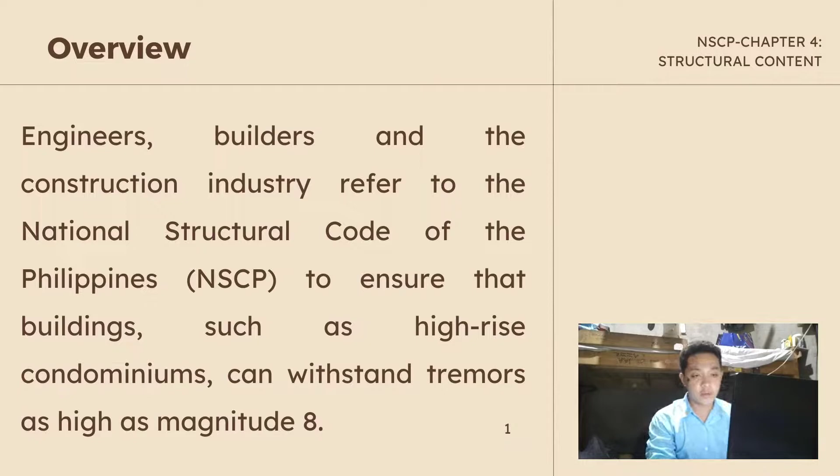Let us now move on to Section 414, Plain Concrete. This section implies the design of plain concrete members, including members in building structures and non-building structures, such as arches, underground utility structures, gravity walls, and shielding walls.

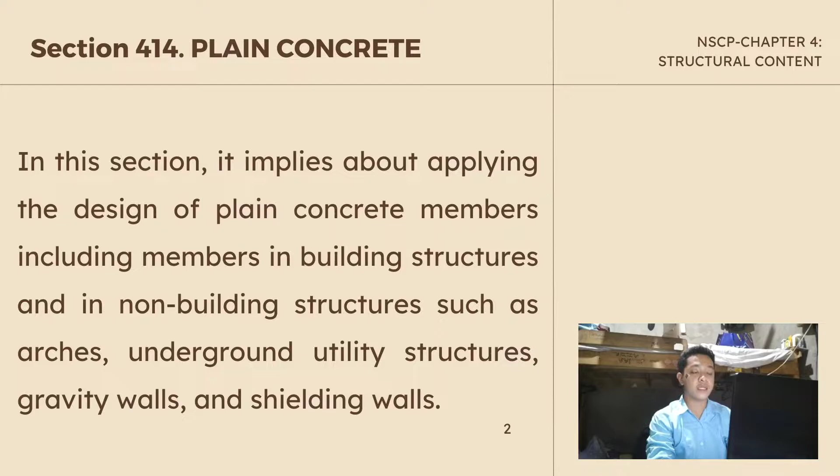It is mentioned in the section that it shall not govern the design of cast-in-place concrete piles and piers embedded in ground, and plain concrete shall not be permitted for columns and piles.

Now for Section 418, Earthquake-Resistant Structures. This section shall apply to the design of non-pre-stressed and pre-stressed concrete structures assigned to seismic zone 4, and a reinforced concrete structural system not satisfying this section shall be permitted if it is demonstrated by experimental evidence and analysis that the proposed system will have strength and toughness equal to or exceeding those provided by a comparable reinforced concrete structure satisfying this section.

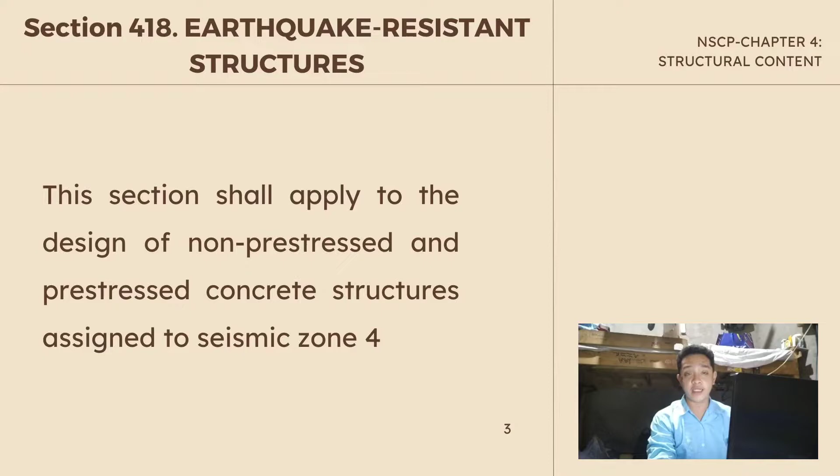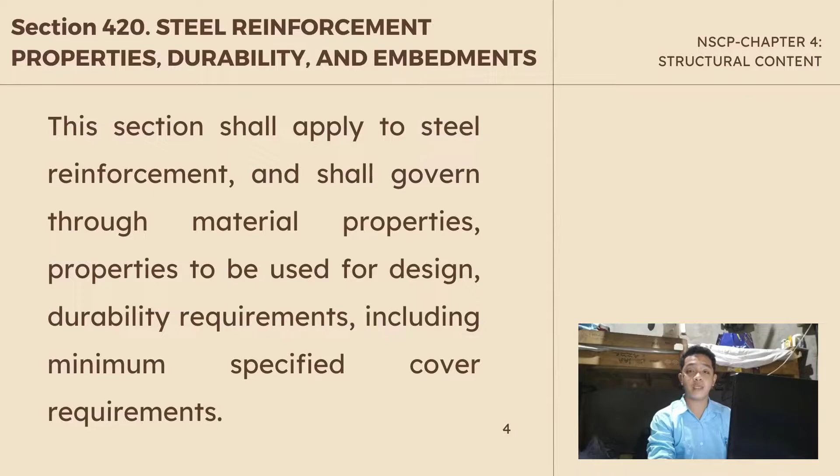Now for Section 420, the section shall apply to steel reinforcement and shall govern material properties to be used for design, durability requirements, including minimum specified cover requirements. Moreover, it is specified that non-pre-stressed bars and wires shall be deformed, except plain bars or wires are permitted for use in spirals.

Section 423, Strut and Tie Models. This section shall apply to the design of structural concrete members or regions of members where load or geometric discontinuities cause a nonlinear distribution of longitudinal strains within the cross-section.

Any structural concrete member or discontinuity region in a member shall be permitted to be designed by modeling the member or region as an idealized structure. The strut shall be designed in accordance with the strut and tie method in Section 423. The strut and tie models shall consist of struts and ties connected at nodes to form an idealized truss.

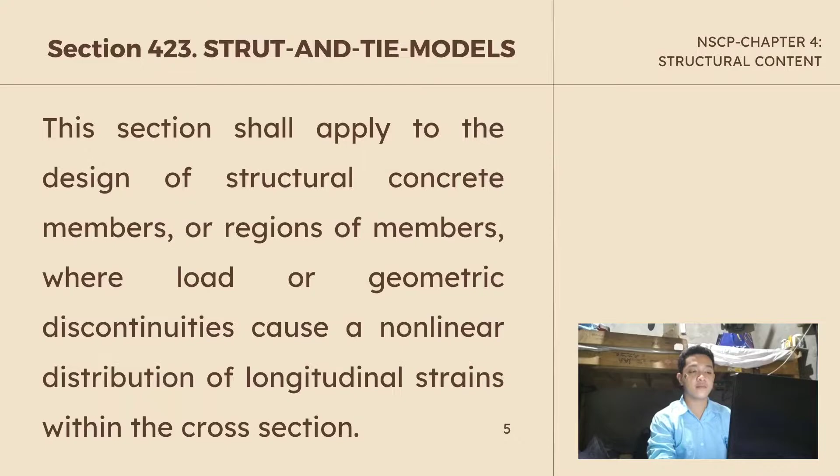Let us move on to Section 425, Reinforcement Details. This section shall apply to reinforcement details, including minimum spacing, standard hooks, seismic hooks, and cross ties, development of reinforcement, splices, bundled reinforcement, transverse reinforcement, post-tensioning anchorages, and couplers.

For parallel non-pre-stressed reinforcement placed in two or more horizontal layers, reinforcement in the upper layers shall be placed directly above reinforcement in the bottom layer, with a clear spacing between layers of at least 25 mm.

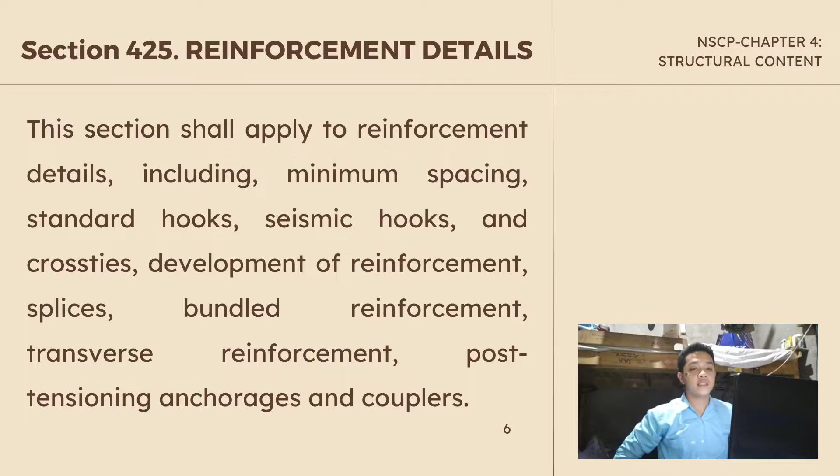Section 426, Construction Documents and Inspection. This section addresses design, compliance, and inspection requirements that the licensed design professional shall specify in the construction documents, if applicable.

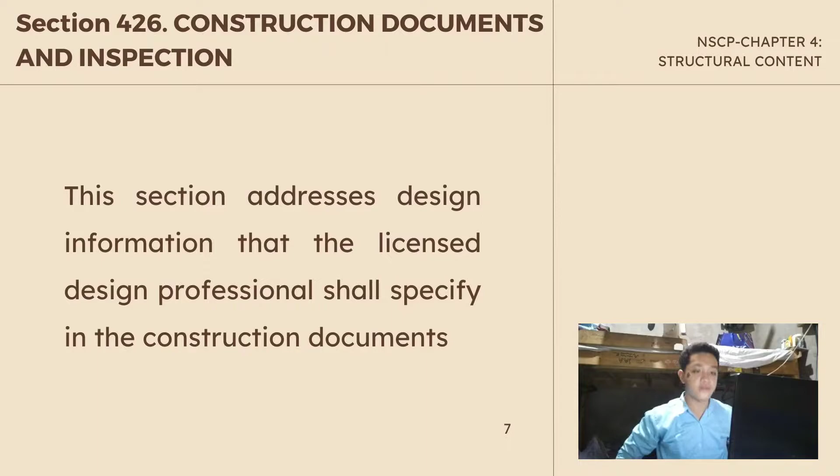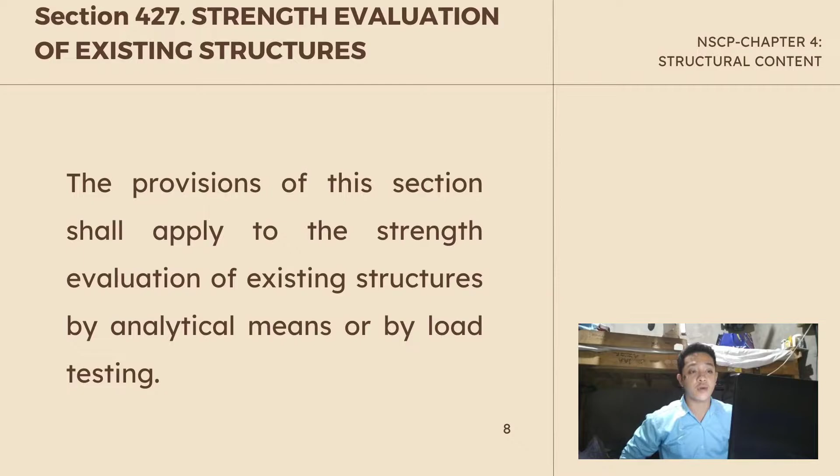Now let's proceed to Section 427, Strength Evaluation of Existing Structures. The provisions of this section shall apply to the strength evaluation of existing structures by analytical means or by load testing. If there is doubt that a part or all of a structure meets the safety requirements of this code, and the structure is to remain in service, a strength evaluation shall be carried out as required by the licensed design professional or the building official.

Section 428, Building Code Requirements for Concrete Thin Shells. The provisions of this section shall apply to thin shell and folded plate concrete structures, including ribs and edge members. All provisions of this code not specifically excluded and not in conflict with provisions of Section 428 shall apply to thin shell structures.

In Chapter 4 of the National Structural Code of the Philippines, we can find two appendices, Appendix A and Appendix B.

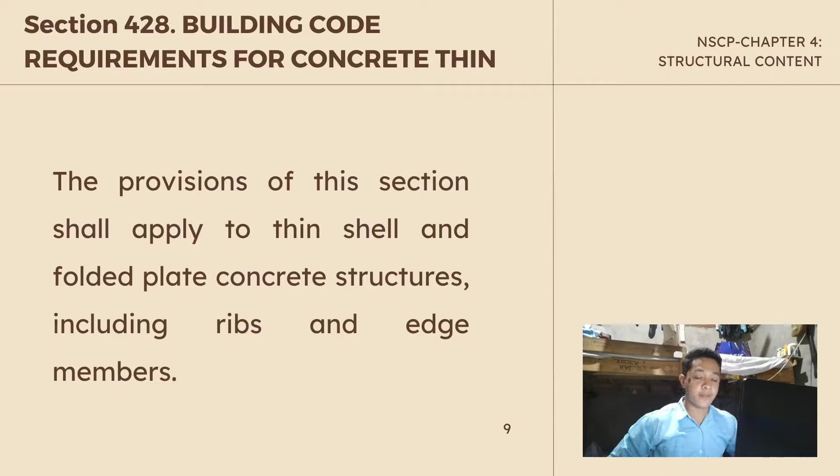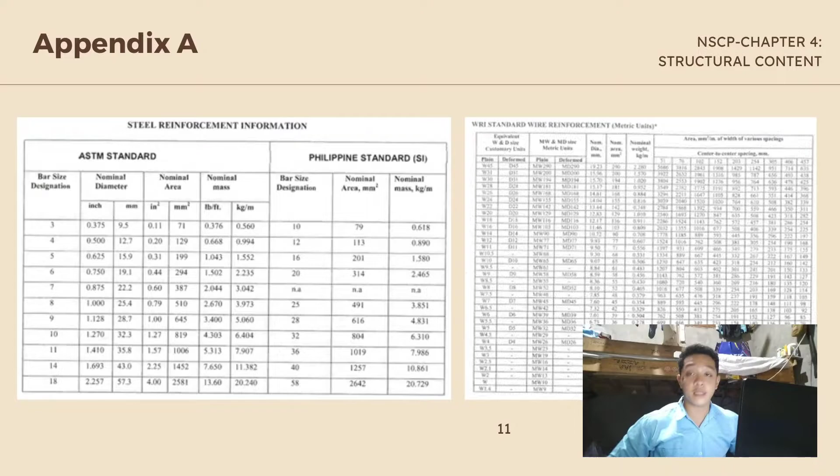In Appendix A, this appendix presents information on size, areas, and weights of various steel reinforcement. Moreover, we can find steel reinforcement information, ASTM standard reinforcement bars, and WRI standard wire reinforcement, which is in metric units. In Appendix B, this appendix shows the equivalence between SI metric, MKS metric, and US customary units for non-homogeneous equations in this code.

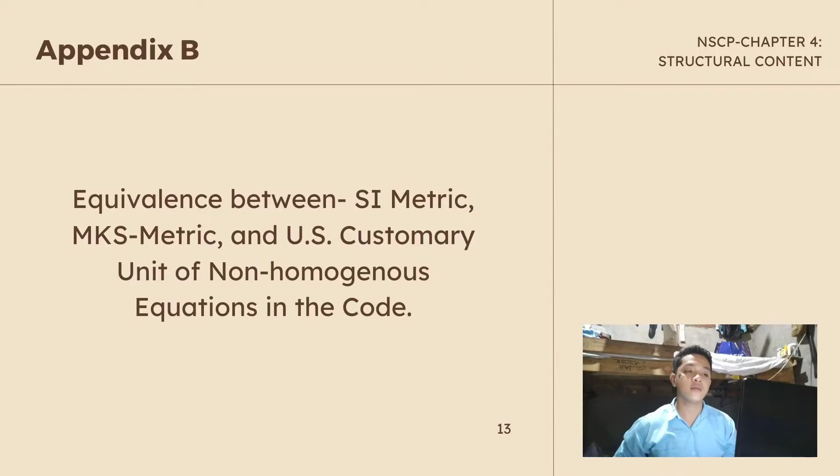Now let us proceed to Chapter 5 of the NSCP, which is Structural Steel. Chapter 5 of the NSCP was adopted through the American Institute of Steel Construction, or AISC, by the Association of Structural Engineers of the Philippines.

This chapter is divided into three parts: the specification for steel members, seismic provisions for structural steel buildings and for composite structural steel and reinforced concrete buildings, and lastly, the specifications for design of cold-formed steel structural members. This chapter sets forth criteria for the design, fabrication, and erection of structural steel buildings and other structures, where other structures are defined as those designed, fabricated, and erected in a manner similar to buildings with building-like vertical and lateral load-resisting elements.

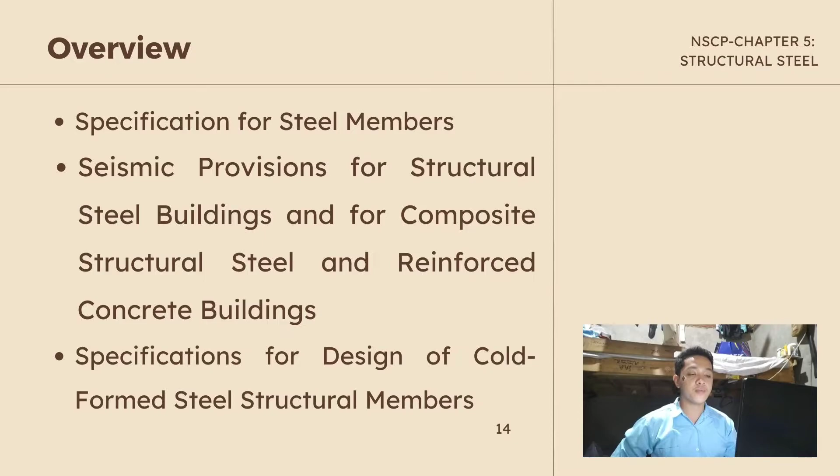Where conditions are not covered by this chapter, designs are permitted to be based on test or analysis, subject to the approval of the authority having jurisdiction.

So Part 1, Specification for Steel Members. Section 501, General Provision, states the scope of the specification, summarizes reference specification codes and standard documents, and provides requirements for materials and contract documents.

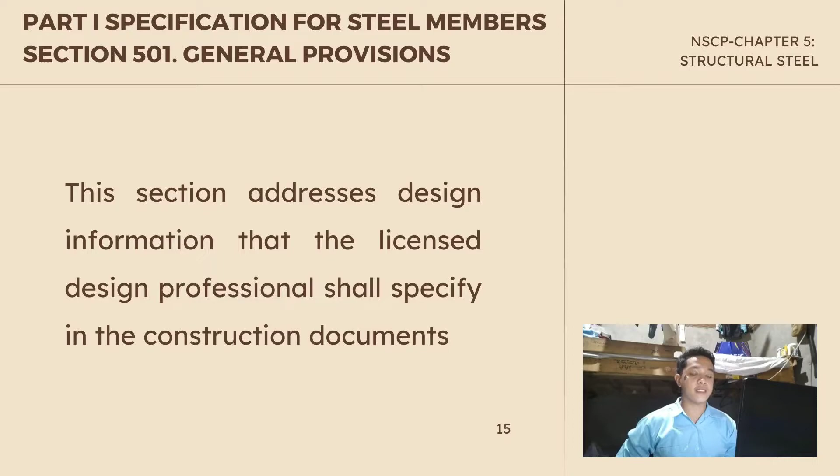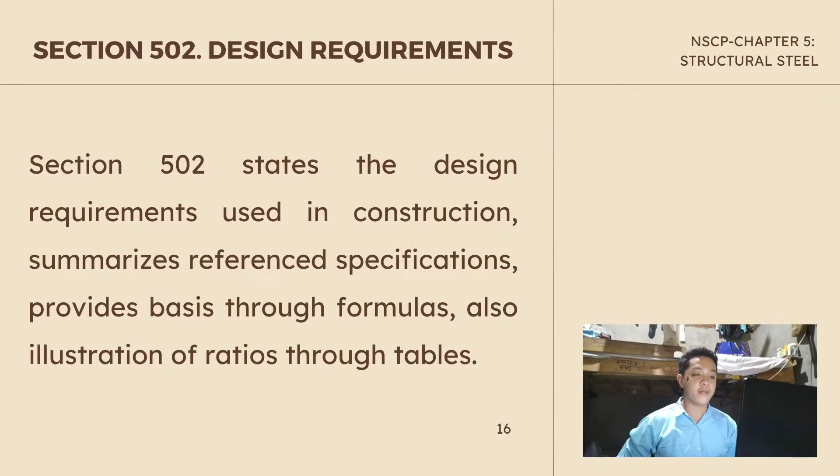Section 502, Design Requirements, states the design requirements used in construction, summarizes reference specifications, provides basis through formulas, and illustration of ratios through tables. The design of members and connections shall be consistent with the intended behavior of the framing system and the assumptions made in the structural analysis. Unless restricted by this chapter, lateral load resistance and stability may be provided by any combination of members and connections.

Section 503, Stability Analysis and Design, states the stability design requirements, summarizes reference specifications, and provides methods and calculations for required strengths. Stability shall be provided for the structure as a whole and for each of its elements. Any method that considers the influence of second-order effects, flexural, shear, and axial deformations, geometric imperfections, and member stiffness reduction due to residual stresses on the stability of the structure and its elements is permitted. All component and connection deformations that contribute to lateral displacements shall be considered in the stability analysis.

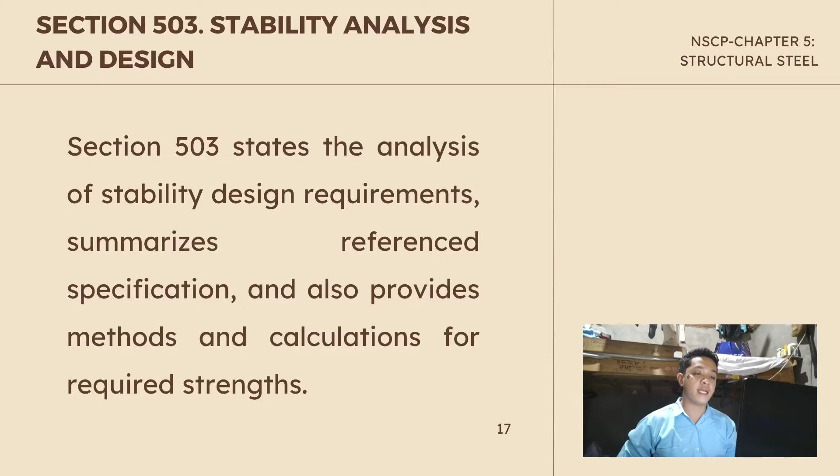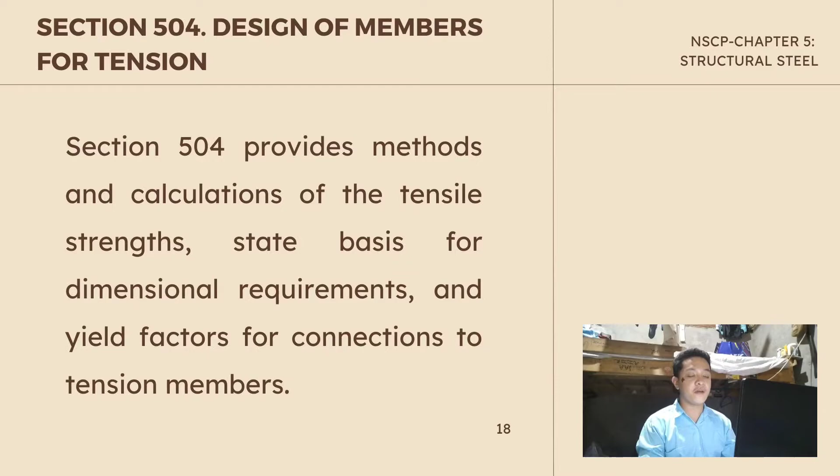Section 504, Design of Members for Tension, provides methods and calculations of the tensile strengths, states basis for the dimensional requirements, and yield factors for connections to tension members.

Section 505, Design of Members for Compression, states the slenderness limitations and effective length, compressive strength for flexural buckling of members, and for torsional and flexural torsional buckling of members without slender elements, also the dimensional requirements. Furthermore, it states the member with slender and stiffened slender elements.

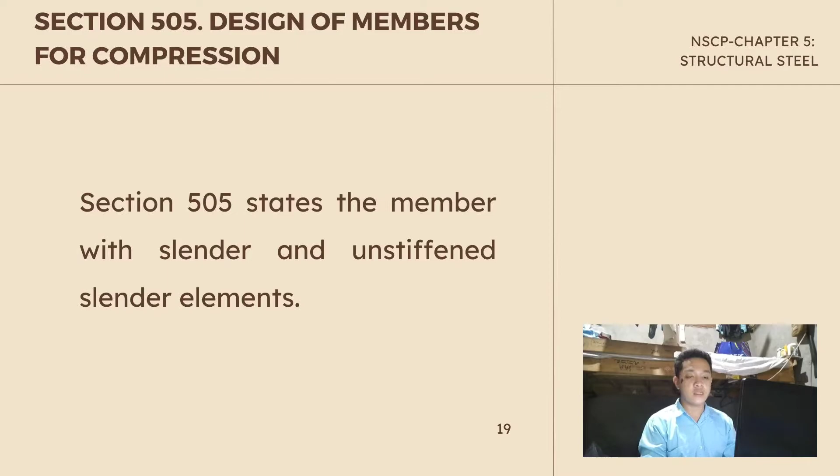Section 506, Design of Members for Flexure, shows the selection table for the application. It states the doubly symmetric compact I-shaped members and channels bent about their major axis, and members with compact webs and non-compact or slender flanges bent about their major axis, covering lateral torsional buckling, compression flange, local buckling, and yielding. Also the square and rectangular HSS and box-shaped members.

Section 507, Design of Members for Shear, states the transverse stiffness, nominal shear strength with tension field action, single angles, rectangular and round HSS, weak axis shear in singly and doubly symmetric shapes, also the beams or girders with web openings.

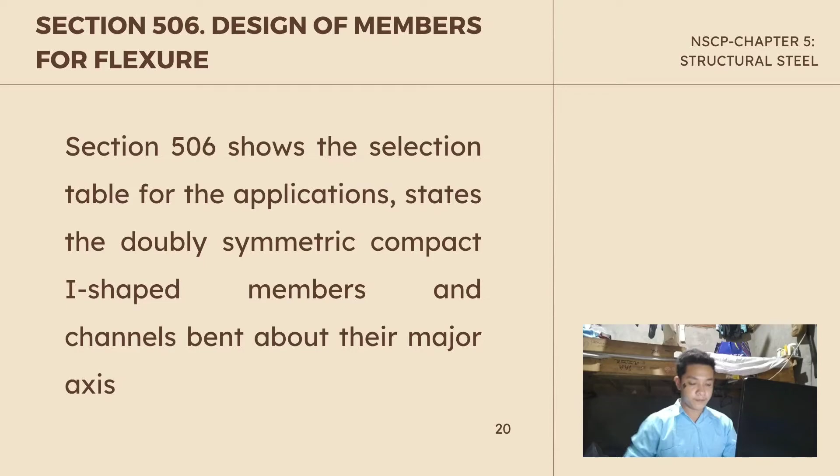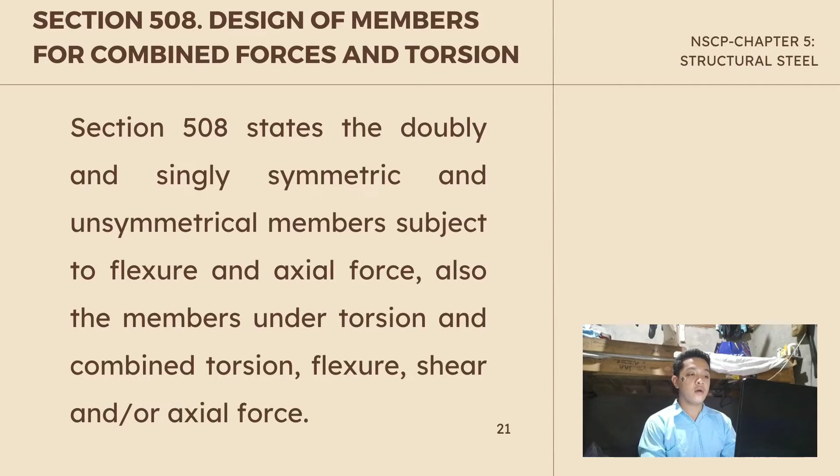Section 508, Design of Members for Combined Forces and Torsion, states the doubly and singly symmetric and unsymmetrical members subject to flexure and axial force. Also the members under torsion and combined torsion, flexure, shear, and or axial force.

Section 509, Design of Composite, states the nominal strength of composite sections, material limitations, and shear connectors. It also specifies the axial members, flexural members, and flexural strength of concrete encased and filled members.

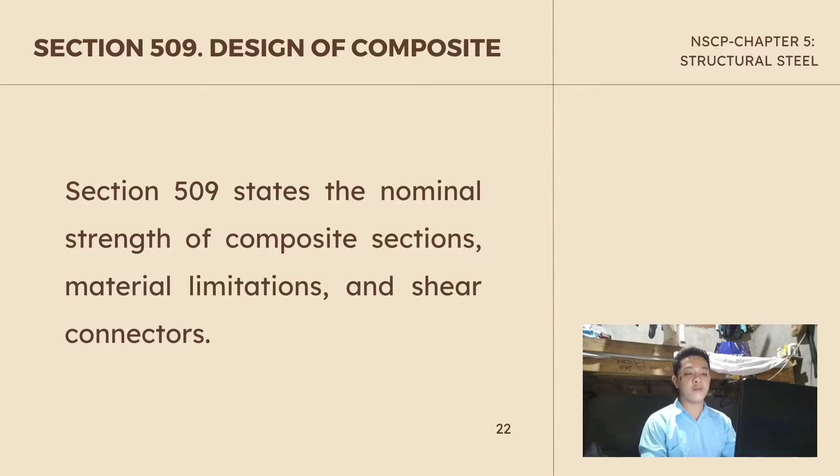Section 510, Design of Connection, states the design basis, simple connections, moment connections, compression members with bearing joints, splices in heavy sections, beam copes and weld access holes, placement of welds and bolts, bolts in combination with welds, high strength bolts in combination with rivets, and limitations on bolted and welded connections.

Furthermore, it also specifies the welds, bolts, and threaded parts, affected elements of members and connecting elements, fillers, splices, bearing strength, column bases, and bearing on concrete, anchor rods and embedment, and flanges and webs with concentrated forces.

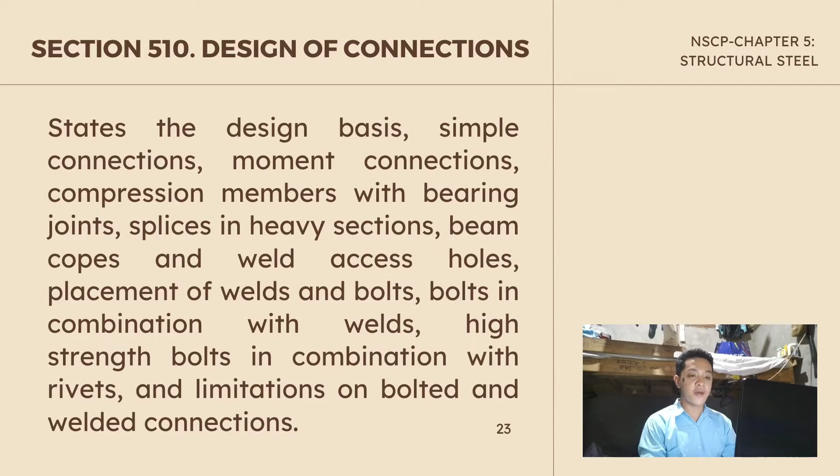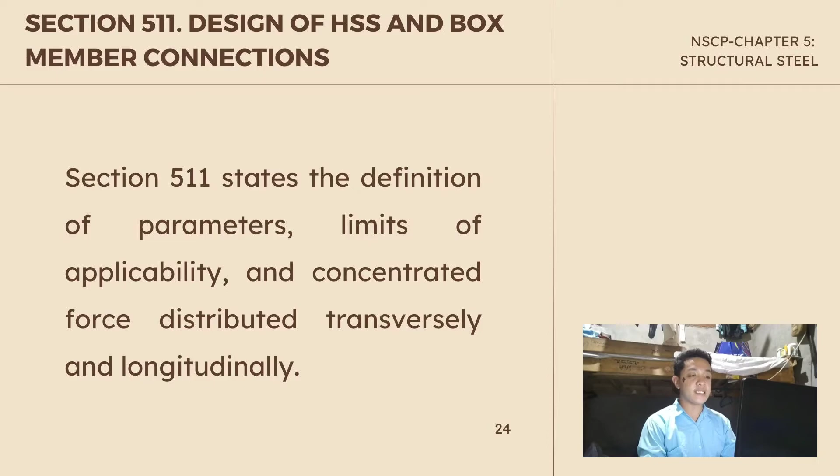Section 511, Design of HSS and Box Member Connections, states the definition of parameters, limits of applicability, and concentrated force distributed transversely and longitudinally. It also specifies the HSS to HSS truss and moment connections.

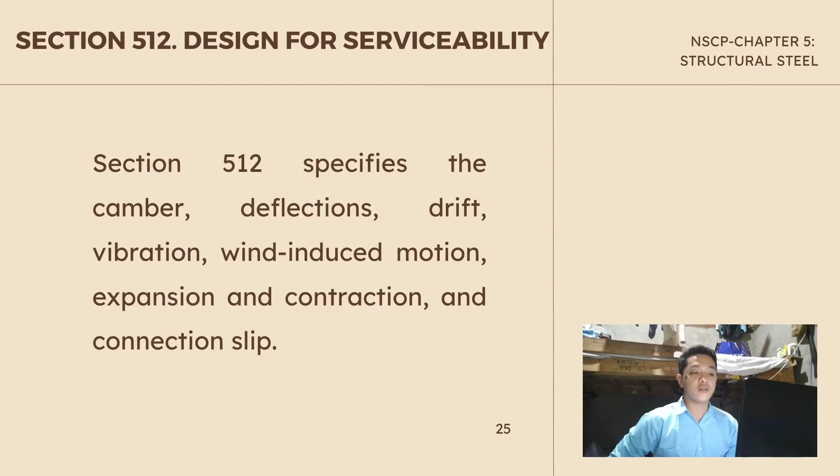Section 512, Design for Serviceability, specifies the camber, deflections, drift, vibration, wind-induced motion, expansion and contraction, and connection slip. Section 513, Fabrication, Erection, and Quality Control, specifies the drawings, fabrication, shop painting, erection, and quality control.

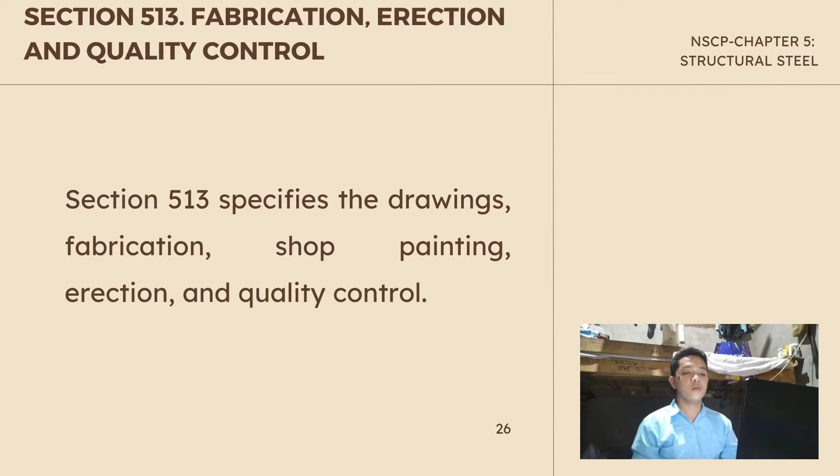So in Chapter 5 of the NSCP, which is the Structural Steel chapter, we can find 7 appendices.

Appendix A, Inelastic Analysis and Design. Appendix A1 provides specification of its general provisions, materials, moment redistribution, local buckling, stability and second-order effects, columns and other compression members, beams and other flexural members, members under combined forces, and connections.

Appendix A2, Design for Ponding. It provides specifications for simplified and improved design for ponding.